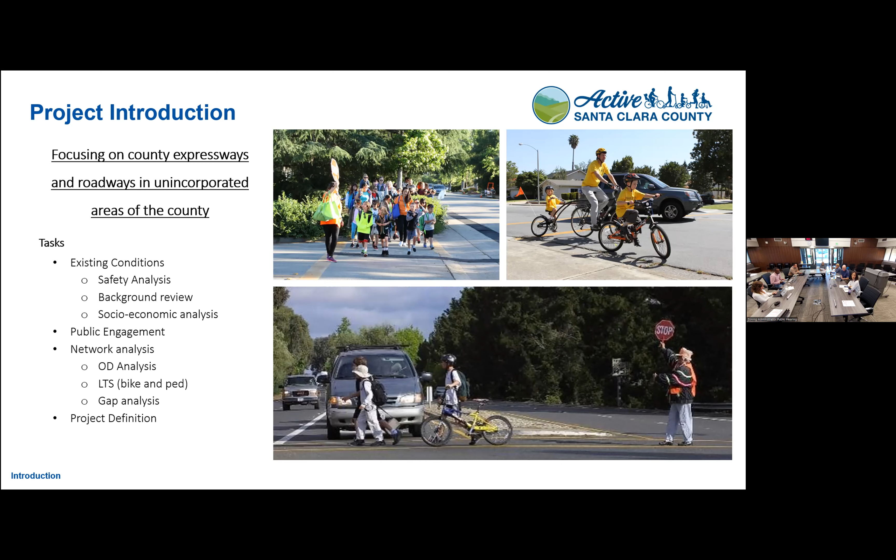In terms of the timeline, this is one of those COVID projects, so it's taking a little longer than usual. We started very much online, then went a little public, then back online. I'm just happy that I'm seeing happy faces over here for the recommendations—I'm assuming you guys are happy, right?

We are at the recommendations phase, so at this point we're requesting feedback from the community on the recommendations we're putting out. After that, we're going to take all of our recommendations and your recommendations, mesh them together, prioritize them, and then publish a draft plan so the community will also have input on that. Hopefully by the end of the year, winter of 2023-2024, we'll have a plan we can push forward for final approval.

Again, providing a quick summary of what we've been doing. These analyses, particularly the health and equity analyses, will help us really focus on how to prioritize, and where to prioritize, for all of these things.

We wanted to understand where the more disadvantaged folks live. This is not just Los Altos, not just the northern part—I am just presenting today the northern part of the county since we're talking about Los Altos—but we wanted to understand where the highest concentration of equity priority communities, as defined by the Metropolitan Transportation Commission, or MTC, are located. For the most part, many of those communities are in San Jose, in the core of San Jose, in the northern part, and also the southern part. There are pockets in Gilroy and in the southern parts of the county.

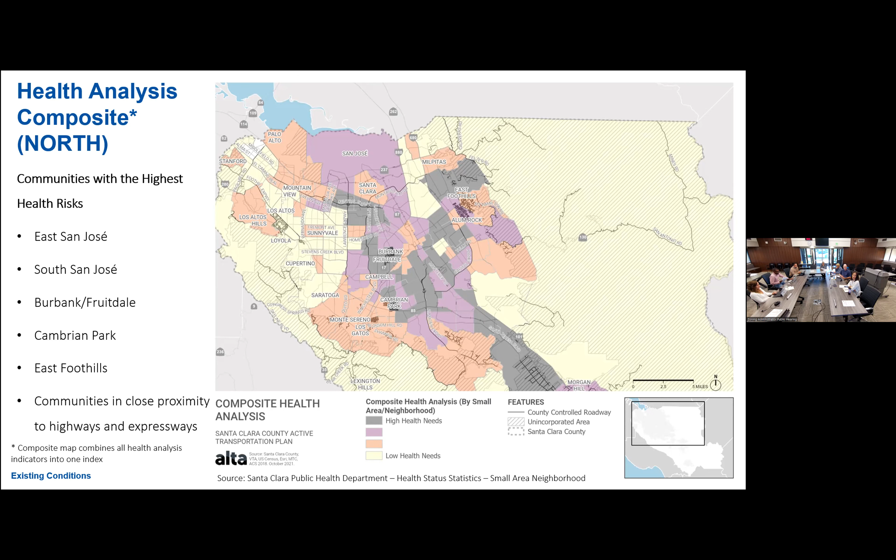Likewise, we did an analysis of health components. We looked at life expectancy, high blood pressure, heart disease, prevalence of cancer, and diabetes. Meshing them together, we understood that the highest prevalence of health inequities, again, are very much located in those areas I mentioned before, on East San Jose, some of the foothills, and some of the pockets in unincorporated areas.

As part of this existing conditions analysis, we also looked at what's going on the roadways in terms of collisions. Some folks call them collisions, some folks call them crashes—I'm going to refer to them as collisions.

We started very much in 2021, so we had data up until 2020. We used the latest 5-year data to understand where the highest incidence of collisions were and the types of collisions that were happening. We tried to identify those collision hotspots and where the biggest problems are throughout the county. We tried to look at it from the intersection perspective, but also at the corridor level, looking at the road in a complete way, as a complete street.

So we categorize those into intersection collisions - those that happen within 250 feet of each intersection on each leg - as well as the roadway corridors, which is basically just the longer side of streets.

The source of the data we use is Crossroads, which is pretty much up to the minute level. The county had lots of really good information and data on that. I am going to be presenting mostly aggregated data for the full county. I apologize, I don't have specific ones for Los Altos, but I'm sure folks know where many of them are located.

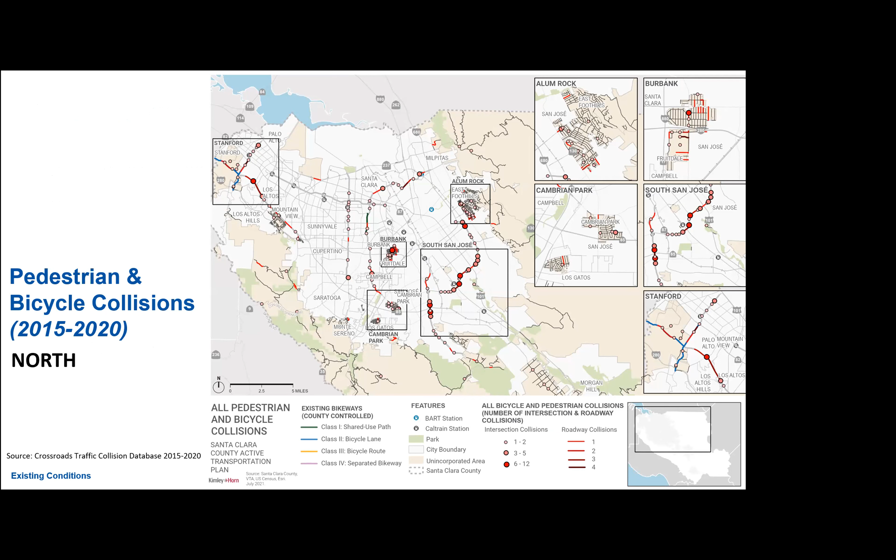This is how we mapped them - you'll see the number of collisions at intersections as well as roadway collisions. For this area in particular, not a big surprise to folks, Foothill really came up highlighted, with 6 to 12 at intersections and more than 4 in some places throughout the expressway. I want to highlight this is 2015 to 2020 data - we have not updated it since then. We've seen generally in the Bay Area that these trends have changed through COVID.

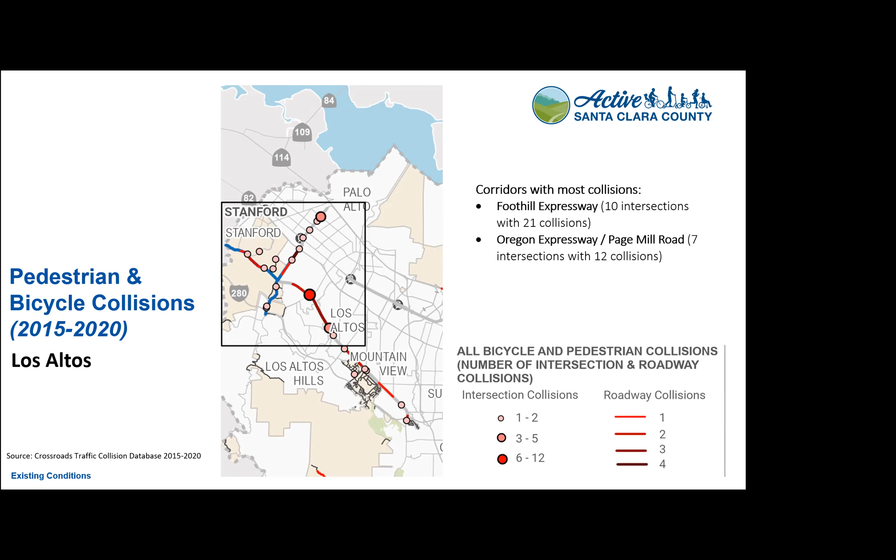Generally speaking, countywide, that's where most of our collisions happen - on expressways. There are a number of collisions on more localized streets in unincorporated areas, but the expressways do tend to experience most of the collisions.

On the community outreach side, this is going to be very high level. We really wanted to focus on going out to the community and being inventive, so we hosted a number of pop-up events as well as going to different places that were already there. In some of the photos you'll see some of the pop-up events we conducted. We also worked with a number of CBO organizations, community-based organizations.

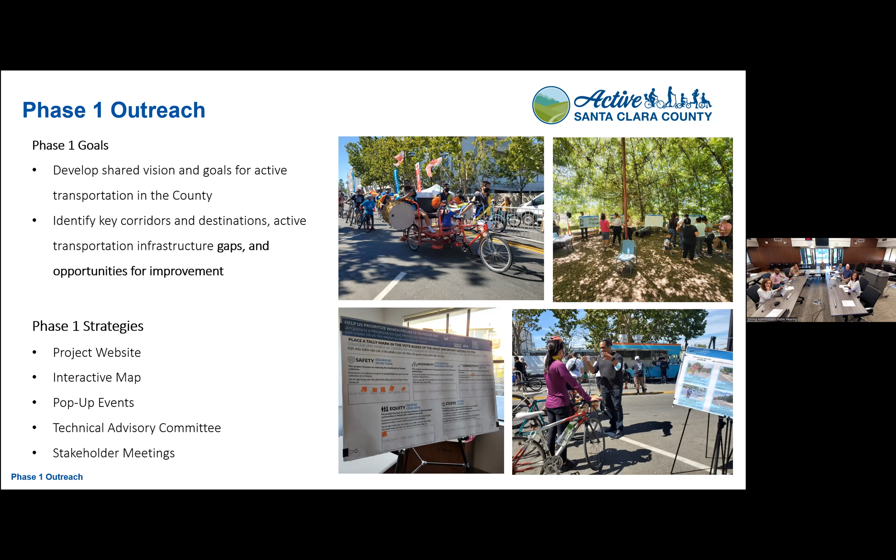And so you see some of the boards and some of the conversations that we had. We also talked to a number of technical advisory committee, or the TAC, as well as stakeholder meetings. We held some of those.

That said, many of the comments we received in phase 1 did come from the northern parts of the county, which is what we expected. So we wanted to go out there to different communities too.

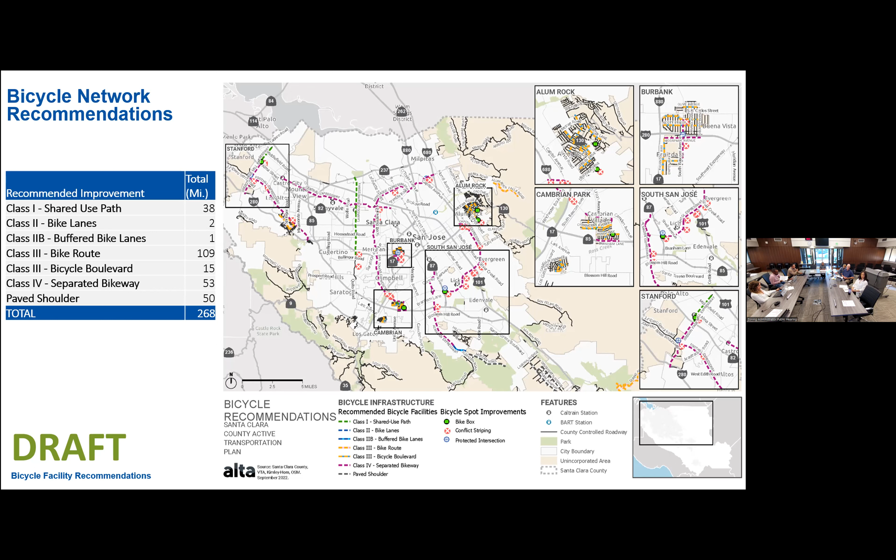This one will be biking. You'll see here in the southern part of the county, it changes a little bit more. We see a lot more people biking recreationally.

So the yellow lines that you see here, the yellow dotted lines, we have them as bike routes, signed bike routes. So that the more Lycra folks like myself, the folks that feel comfortable biking anywhere and everywhere, they can actually do that. At the same time, for those folks that are the mom and pop that need a little bit more help, we did create a bit of a network through trails.

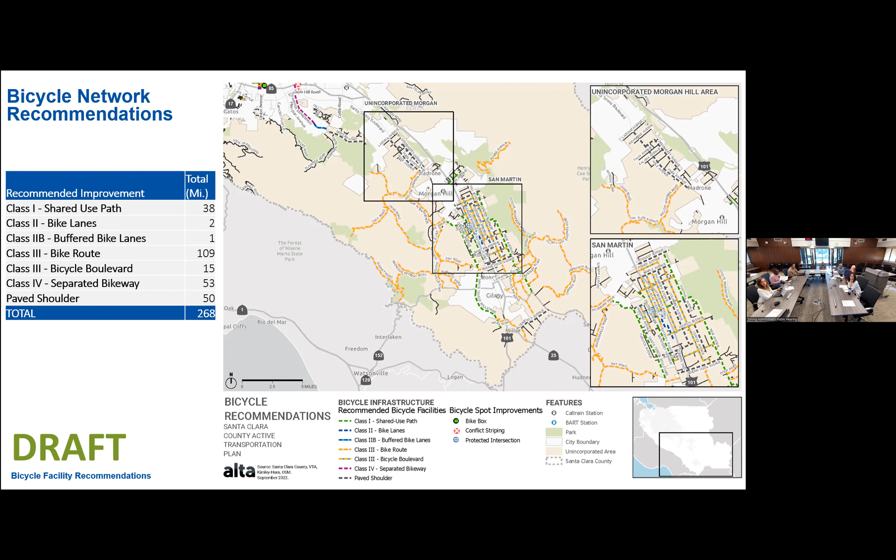And again, this is being coordinated with the trails, with the Parks and Rec Department. So their recommendations are very much linked to our recommendations. Our recommendations are linked to theirs. So there was a cross-pollination and cross-reading.

For Los Altos or close to Los Altos, we're recommending class 3s or bike routes, signed bike routes, and kind of the more neighborhoody streets. But I think the important part to highlight is the Oregon Expressway and of course Foothill Expressway.

We do see the potential to having implementing a class 4 separated bikeway. That is about 10.2 miles from 280 all the way to Oregon Expressway, and Oregon Expressway from Foothill to, what is it, 101, I believe.

Again, these are very draft. We have more details online. You can actually link on each one of these lines and markers and really look into the spot improvements that we're calling for. I'll be talking about the spot improvements on the ped side of things, and I'll be highlighting what we're thinking of those.

Shifting over to peds, they're a little bit of a slower user, so we have to consider those things on how much time it takes to cross, how much time it takes to go along.

So you'll see that very many of these recommendations are along the expressways, either slip lane reconfigurations or improving curb ramps. And I'll talk a little bit about the reconfigurations and what we're talking about.

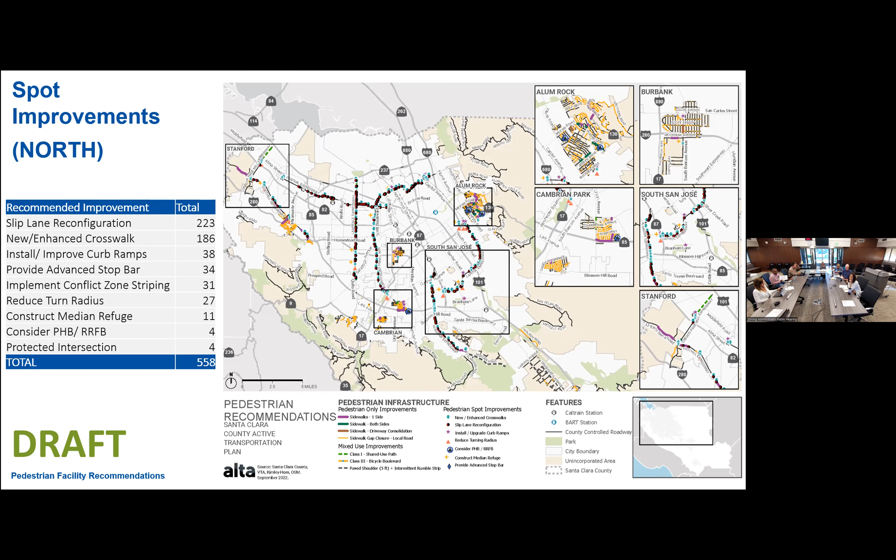Want to highlight a few slip lane reconfigurations. It's mostly focused on Foothill, El Monte, Magdalena, Arboretum, and Vineyard, as well as some sidewalk implementations in some places. You can tell us if we're correct, or if not, we're game as well. We're really focusing on making it easy for people to walk from one place to another and making it harder for cars to go really fast through intersections.

So what do we mean by slip lane elimination? These are some examples that have already been implemented. At the top, this is from a few years ago at Plumeria and Montague, where they had slip lanes. One configuration was closing it and tightening it up, so people driving southbound on Plumeria couldn't just go through the intersection fast, but actually had to slow down and check for pedestrians.

This is an improvement we're calling for, where we see a lot more potential for people walking and biking. This is also called slip lane removal. There are some configurations that will need to be made at that localized level, so again, these are very high level recommendations.

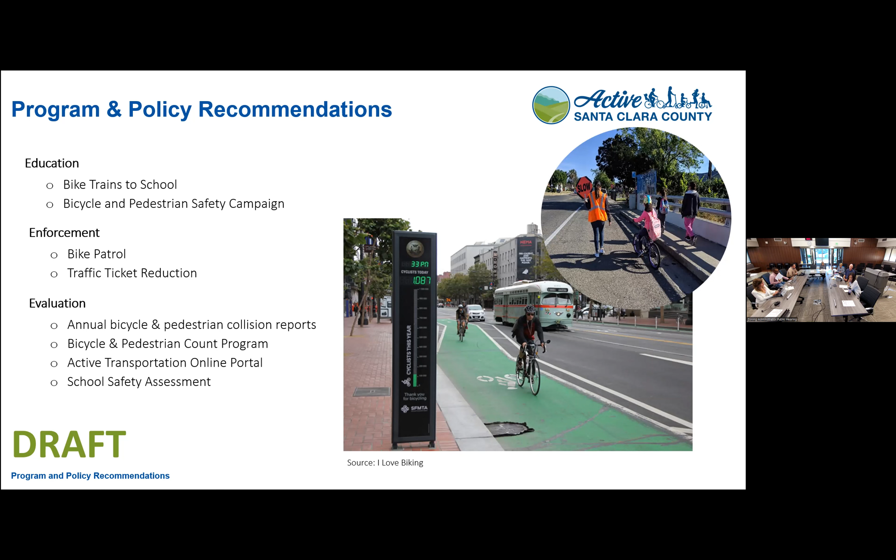Also evaluation - we really do want to know where people bike and or walk. So really having annual counts and collision reports, as well as providing information about what's going on in the county, being very transparent about what's being built. The county's already doing some of these things, but really putting information out for the community to learn what's going on.

And, oh my God, next steps. Again, one thing you'll remember today is the website, right? ActiveSantaClaraCounty.org. We are opening the portal until June 16th, so that's two weeks from Friday.

That was to accommodate a couple more big events, including Viva Calle, as well as a few different jurisdictions that requested this. So that will be the last time residents will be able to provide information or input on the recommendations. After we're done with this recommendation period, we'll move into development of the plan, and you all will be able to opine on the actual plan.

So the document will be posted online. You'll be able to mark it up, tell us if we missed a period or a comma, or if my Spanglish comes out in my English - I do apologize for that. You can tell me that on it.

Again, ActiveSantaClaraCounty.org, that is the website. You can check the recommendations. I see some of you already digging into that, so it's very encouraging. And with that, I will be opening it for questions.

One more thing I wanted to add was the next steps after this master planning level study. The next step will be a corridor level analysis that we're going to do on the expressway. We were able to secure a grant from Measure B, and the expressway got awarded I think $450,000 of money from the Measure B bike/ped program to study this corridor.

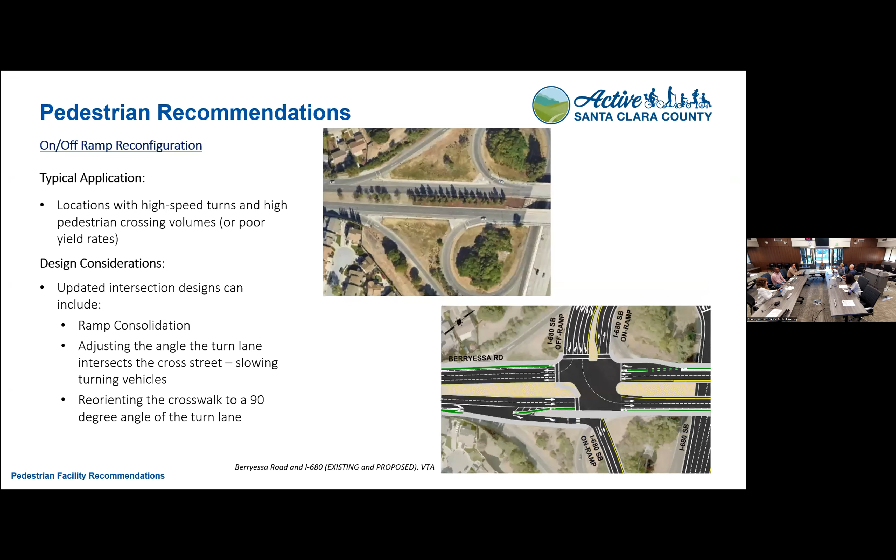The other question I had was, in your data, it's 2015 to 2020. We all know things happened in 2020. Shutdown started around March. How much of 2020 is included in your data? Is that step down of incidents a false indicator of a drop? Because if it includes all of 2020, we stopped driving about March 12th and didn't go back until about March 2022. It's been a minute, crazy, since I looked at the data, so let me actually point you to that, just trying to understand how much of an impact that is on your data.

So if you keep going, this is that bar chart, January 2015 to December 2020, so you're capturing nine months of no driving in there. Less driving, well, only essential driving, only essential driving to the grocery store. So it just helps me understand, because a lot of those corridors are commute corridors, not going to the shopping, grocery store corridor. Okay, if that, that answers my question.

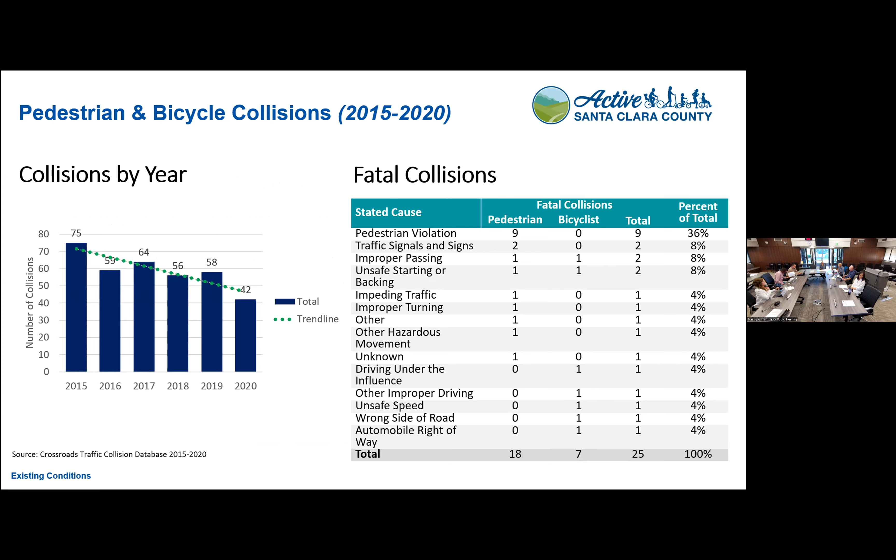I had a question on the Loyola Summerhill Loop, the bike route there. Is that a recommendation coming from the county because that's unincorporated? Correct, so that part around is unincorporated, so yes. If it's incorporated, it's under the jurisdiction of the city, it's not, so it's unincorporated, and that's why. Okay, just clarifying for myself and folks listening.

And then, two more questions. Who pays for these improvements if they're approved? Is that the county budget or is it a cost sharing? So basically, what the plan is, the county roads and airports department gets its funding from tax, gas tax, so we employ the money on road improvements. But the bike path related projects, depending on funding that we can allocate to the bike path, we also are looking into grant applications to get money from the state and the federal government to enhance our budget or to help do these projects.

So will there be any expectation of Los Altos to fund any portion of the design or implementation? That can be discussed with the city if the city has available funding that they can contribute towards an improvement, but as of right now there's no expectation of the city. All right, thank you, those are all my questions for right now. Thank you. Anybody else? Tom?

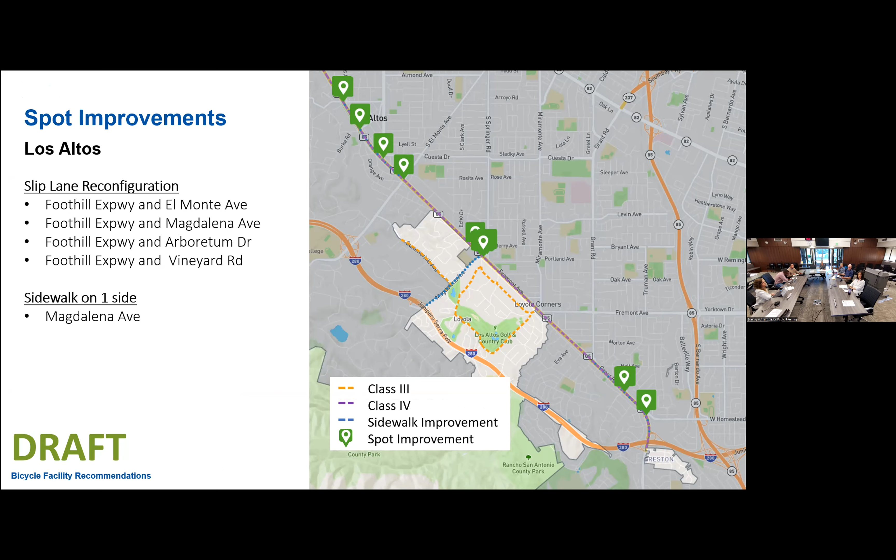Yeah, on these slip lanes or elimination, are you always gonna incorporate right turn only that's shared with cars and bicycles? Your pictures here show that's what you're doing on page 38. So I thought that was a good idea, because what I've seen when they do eliminate that is if you get a bicycle and a car in the same shared lane, one can't pass the other, and I've seen them get frustrated either way, whoever's in first. What's nice in the slip lane is that you can actually take a right turn on red, and I think it alleviates wasted gas, but I understand the idea.

Right, so I like where you've done that, reducing the angle, but also where you have in that picture a shared right lane, and then if a bicycle wants to go straight, you have the green lane. I think that's a really good situation, but I don't know if that's gonna be in all cases. Yeah, I mean, again, these are just examples. This is not a cookie cutter approach. We can't just implement this same facility based on right of way availability, traffic counts, and how much real estate you have.

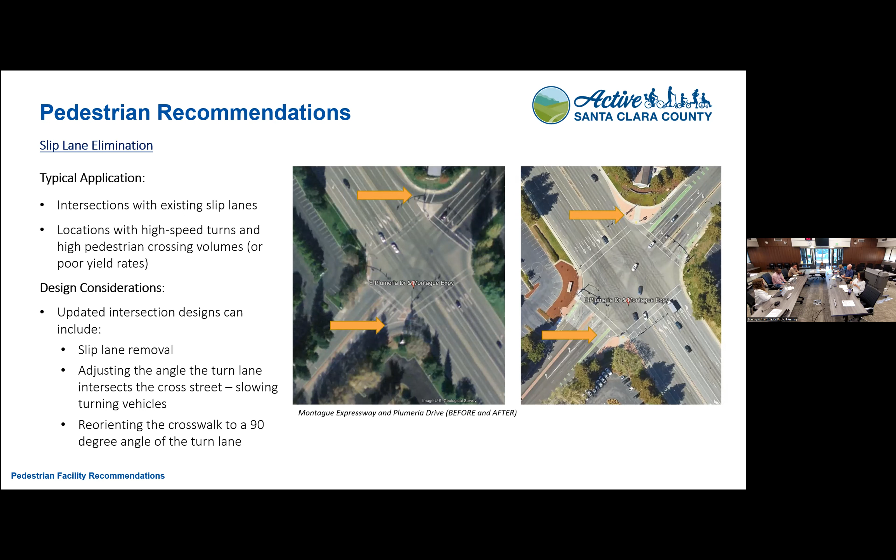Fair enough, but I do appreciate the comment, because I also really love going on the green lane and really appreciate having space for myself rather than competing with other cars or other people. So yeah, I think the point's well taken, and some improvements may not happen because of the number of people driving, the traffic counts I should say. We may not implement specific improvements at specific places. We'll just have to continue to study them a little bit more.

Again, this is a very master planning effort, so I can't just say, hey, let's implement this right here. I'm just telling you what we can see, in professional opinion, with the right of way we're using and the amount of traffic we're more or less seeing, we think it's possible. Also, this is done by the planning department, which is a policy level, plan level study. The traffic department, which oversees the operational aspect of the expressways and the rural roads, will be having a strong opinion on implementing this improvement. So it's on a case by case basis and location dependent. That's good, comfortable. Okay, thank you.

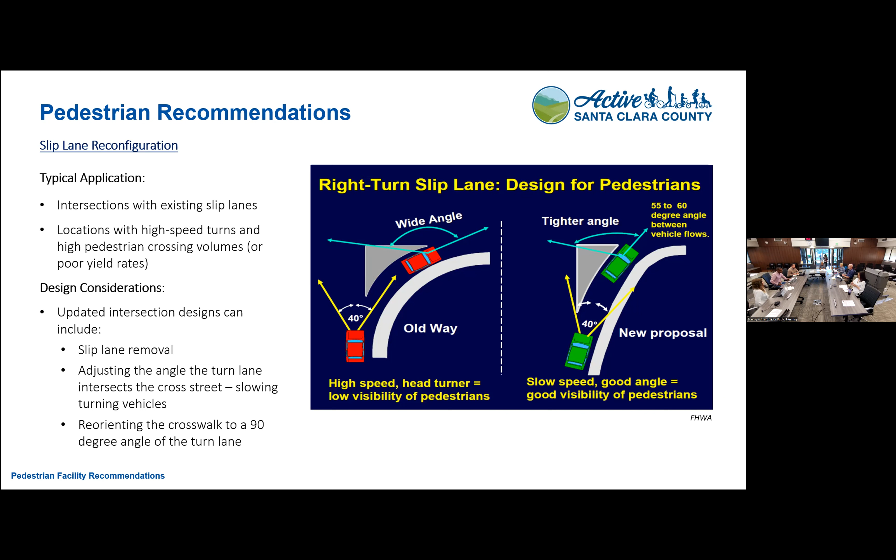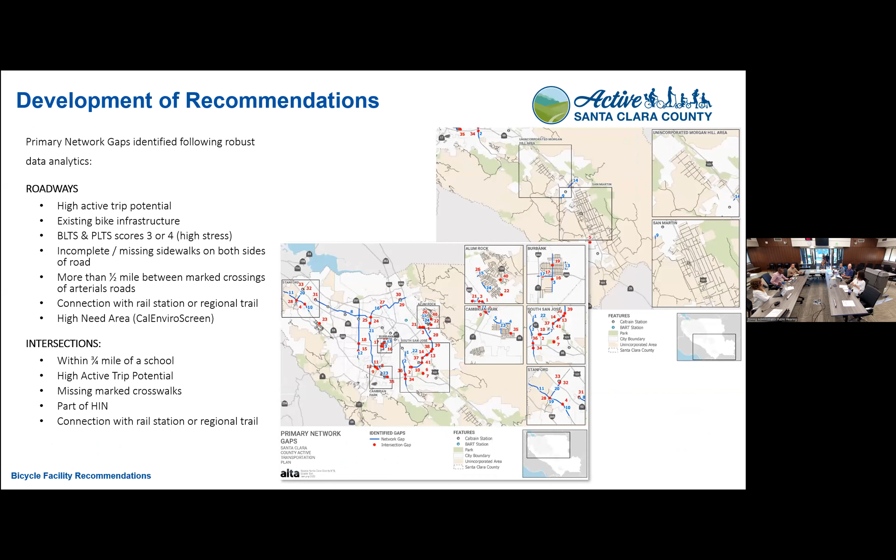Yeah, a question on the primary network gap slide. I think you're showing one gap, is that right? Yeah, that's it. In this one, but try to blow it up.

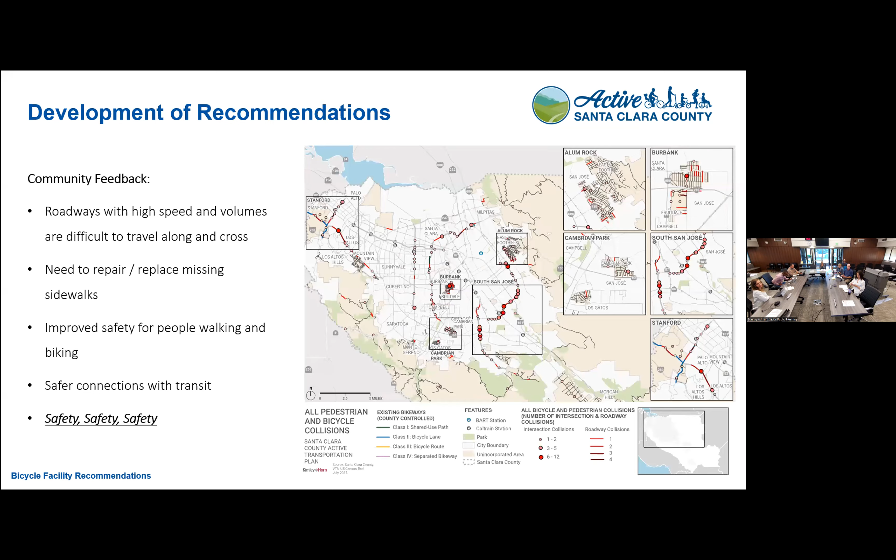It's going, sorry, it leads to the 237... 34 there, slide 34. Sorry, I don't have my slide. What's the name of the slide?

Bicycle network. This is the primary network gaps after needs analysis findings. Most of this one, yeah.

There's that blue network gap line running leading to 237. Is that Grant Avenue, or is that in Los Altos? I wanted to see where number 12 is on the blue. Oh yeah, that's right here. It's the Cupertino 85, isn't it? That is Cupertino. Oh sorry, yeah, that was Los Altos, 85, yeah.

So basically Los Altos is this portion. Sorry, that's as much as I could do. No, I totally misread the 237 marker over there.

I do want to highlight that the numbers in these maps are very much tied to the number of intersections and number of segments, not actually highlighting the actual roadway. So the reds and blues are segments and intersections that were highlighted in the primary network gaps. Does that make sense? Okay, got it.

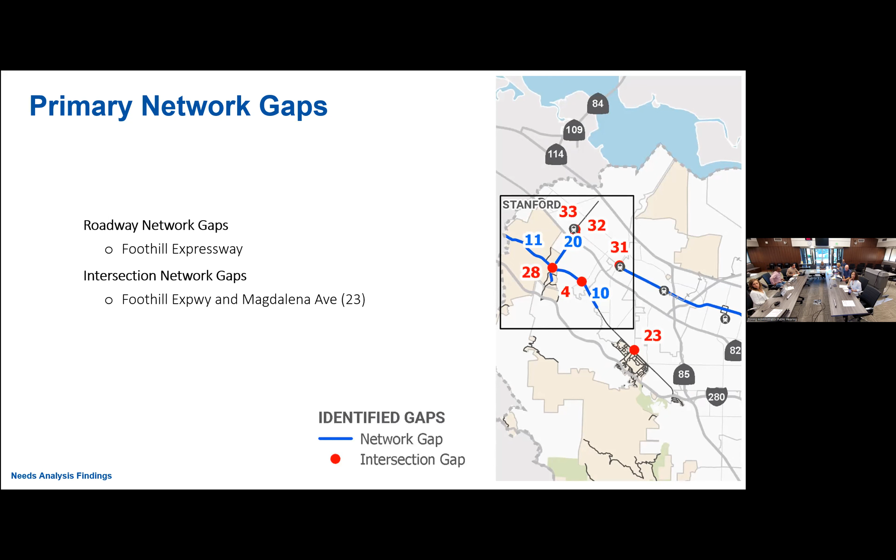I just have a couple of quick questions. Can you go back to your timeline on the entire project? So yeah, can you go back to the project from... I'm looking at you while I do it. Sorry, okay, that's fine, it's gonna take a while.

So you're closing public comments on the online maps on the 15th, on the 16th, June 16th. But I'm seeing that you have the recommendation public input map all through summer. Is this just a plan to close it early, or?

Yeah, so we started recommendations about a month and a half ago. It's us developing the recommendations and putting it all together, because after we close the public inputs, we still have to go back and discuss it with the county and say, hey, these recommendations we're including or taking out, and this is how we're going to prioritize. So as part of that recommendations portion of the plan, we still have to go through a level of analysis that tells us, all right, these are all the projects, where should they land in terms of implementation? Are they priority projects we can implement right now? Are there priority projects that are going to cost a ton of money? So where can we get them in terms of implementation? Basically we'll be done with all of the analysis by the end of summer, whereas we hope to have a full draft document that you can see.

Can you give a general idea of what the response from the Los Altos segment was so far on the maps? Do you have an idea?

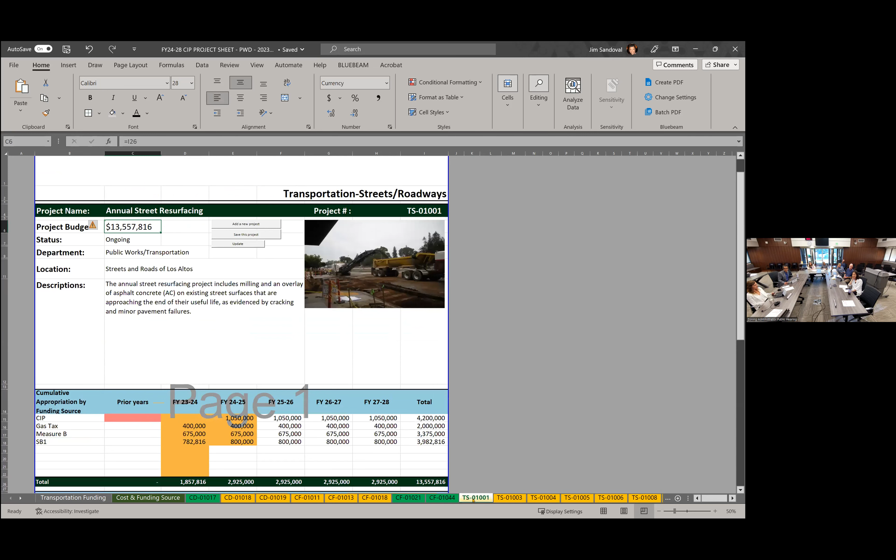The next project is street resurfacing. This is a multi-pronged CIP because we have one budget for overlay work, resurfacing with asphalt, another one for slurry sealing, and we actually do micro surfacing, which has a little more aggregate in it.

And then council committed to 3.5 million per year to get to our PCI of 75 by year 26. And so we're actually doing super well at that.

Did Nafis already present that? Okay, I don't want to steal her thunder, but we're ahead of schedule. So we're doing extremely well. We just got the study.

So for the resurfacing portion, each one of these cut sheets shows the 5-year CIP. And as you can see for asphalt overlays, this upcoming year, we're not putting any CIP money towards that.

We're committed to a maintenance of effort. So with these Measure B and SB1 funds, we have to match a certain amount. I think it's 1.9 million a year, don't quote me on that, but it's right around there.

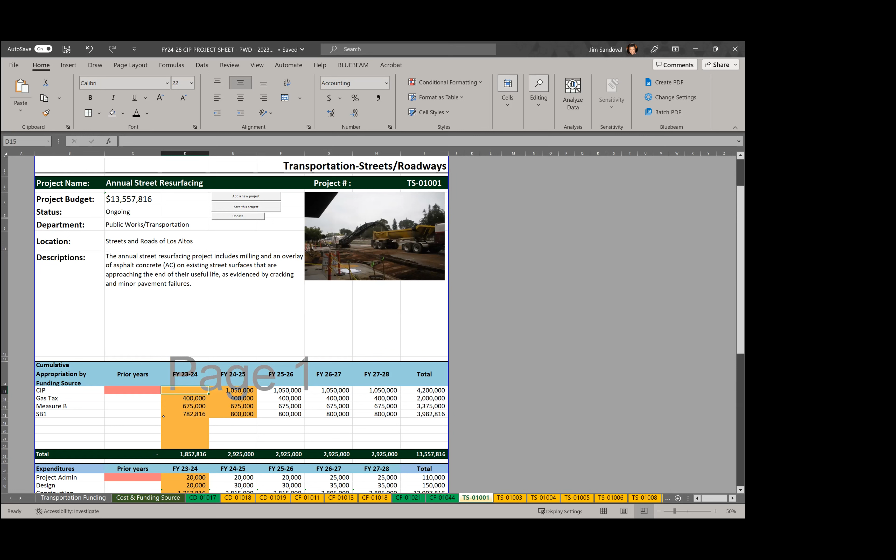And I feel a little more comfortable with that this year just because of how good we're doing with the PCI. And then, yeah, we got gas tax, Measure B, SB1 that all plays into this.

The next project is the annual street striping. So this is kind of a two-pronged project where, when we resurface a road, we've got to grind off all the existing striping and then replace it. And then it is also used for adding complete street elements, bike lanes, and so forth.

So this year we're at 250 for that budget. VRF funds and gas tax.

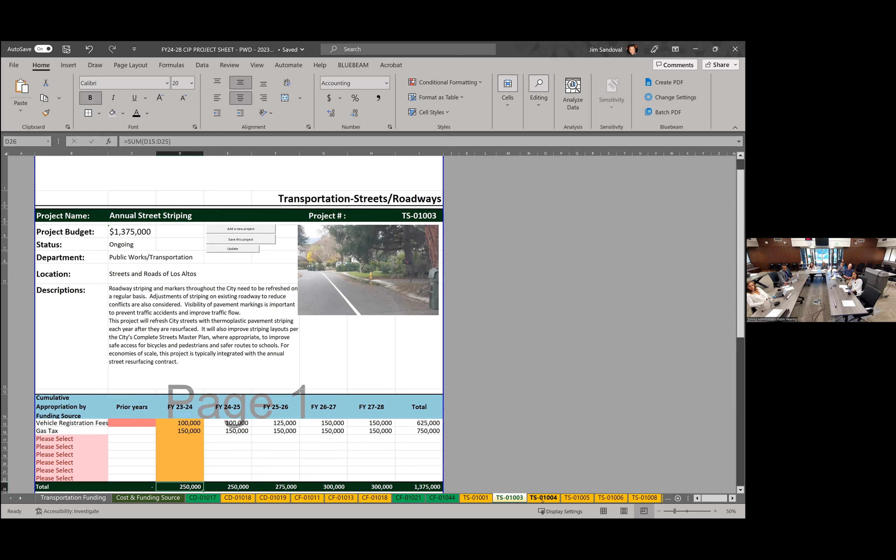The other big element, as I mentioned, is slurry seal, in our case, micro sealing. We're usually more like this 24-25 budget of 1.15 million. Again, this year we...

We kept the gas tax the same. We only had so many VRF funds to go around and we reduced our general fund amount. So this year we reduced it to 750. Overall, that all resurfacing work sums up to about 2.6 million instead of the 3.5.

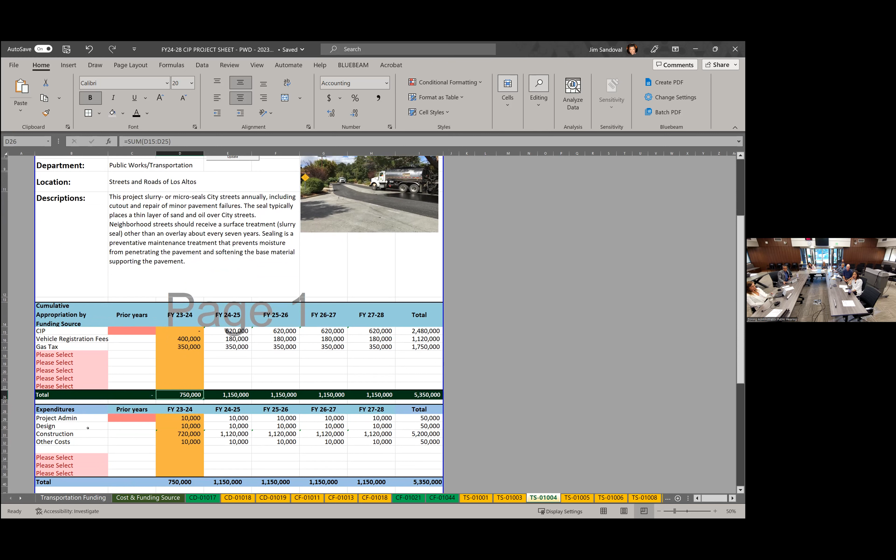And if I didn't explain this, each of these cut sheets covers different portions of the project: project admin, design, construction, and then other costs such as inspection and testing.

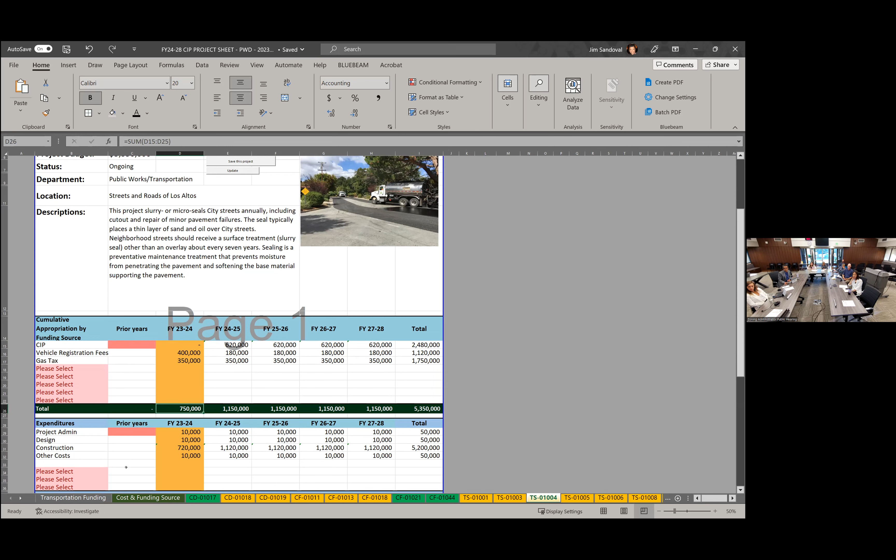Why is there such a drop off on the vehicle registration fees from this year to the next fiscal year? We had some banked VRF funds this year that we haven't used yet, so this was a good place to plug that in. But our normal allocation is about...

Annual concrete repair, reduced this one slightly this year. This is from traffic impact fee. I thought I had $1 million, but I was just told it's $950,000 of estimated transportation impact fees. So that's what we're using for this. Typically this concrete portion is for projects like the St. Joseph Sidewalk Gap project, which we combined with the resurfacing project for economies of scale. It would be for projects where we might have sidewalk needs in the midst of our resurfacing job, or for any kind of ADA ramps that are needed. We have an ADA budget, but it's a little slimmer this year, so we kind of mix and match those two budgets.

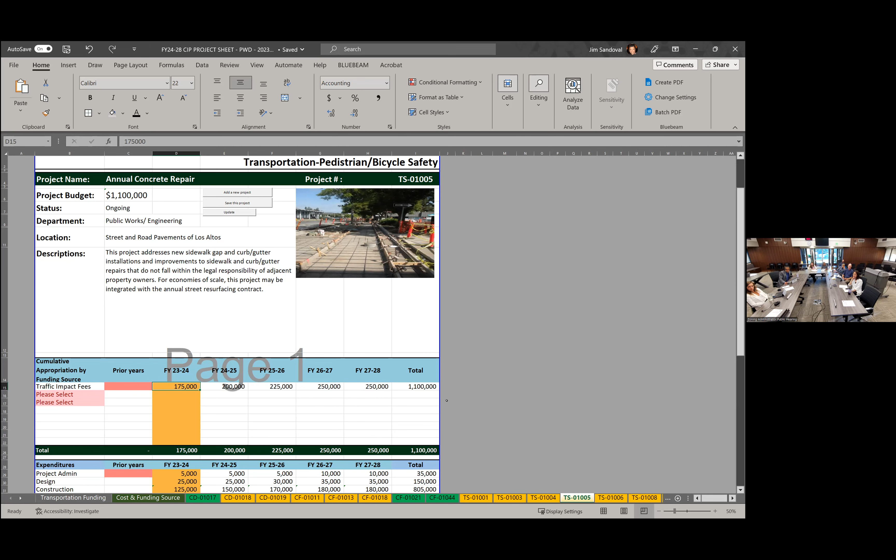Annual traffic sign replacement — this is something we've needed and we're trying to get caught up on. This year I got capacity for about 100 grand. This is to replace signs that have weathered and worn out, and also for adding new signage if Maurice is adding bike lanes or complete streets improvements on roads where we're resurfacing, since those sometimes require supporting signage. We also need to do an inventory and condition assessment of our street signage around town, similar to a PCI, so we can get up to speed on a sign replacement program over time.

This is the annual ADA budget. This year, since I'm trying to spread the money around, I've got 30,000 allocated, growing a little bit over the next couple of years. Again, if there's a greater need than 30 grand, we've got that concrete budget to help with that.

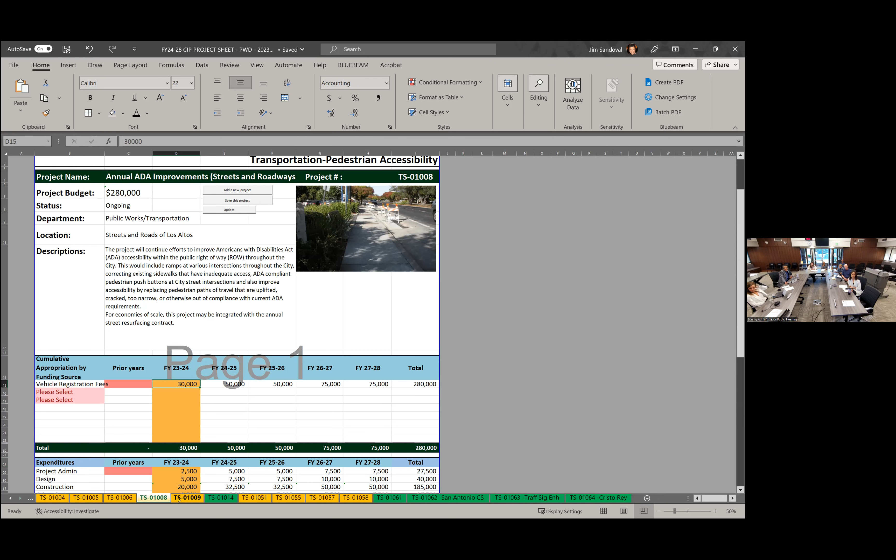Alley resurfacing — we've traditionally funded about 50 grand a year for that, but can't buy much for 50, so we tend to do it every 2 years, at least having 100, so maybe we can do 1 or 2 alleys per year. It's something that needs to happen, not a priority unless it's a super dangerous situation, but compared to all the road work it's not a priority — well, it is a priority because it's in our budget, but it's something we chip away at. This upcoming year is one of the off years, and then the following year's resurfacing budget should add 100,000 to it.

As it turns out, this past year the alleys we selected came in a little higher in bids than 100,000, so we had to kind of rob Peter to pay Paul from some of the other resurfacing funds, but it all worked out in the end. Good choice of words there, DK.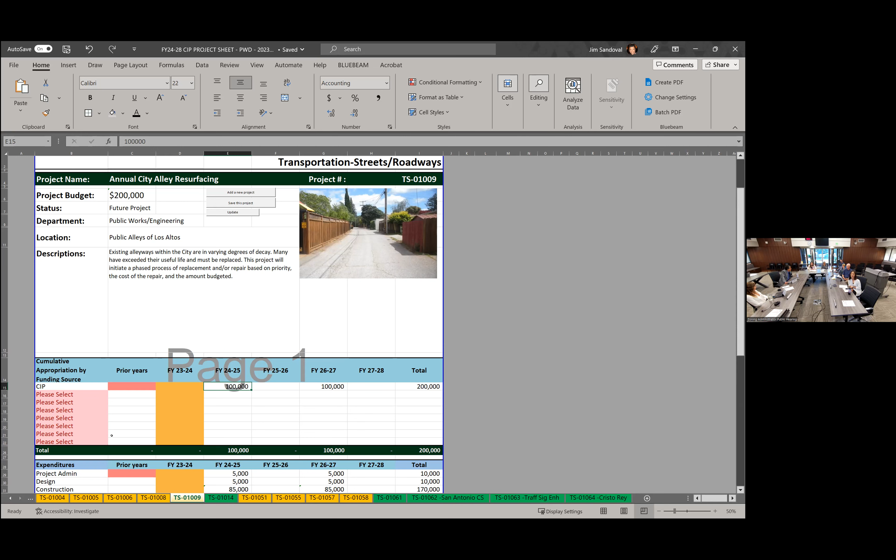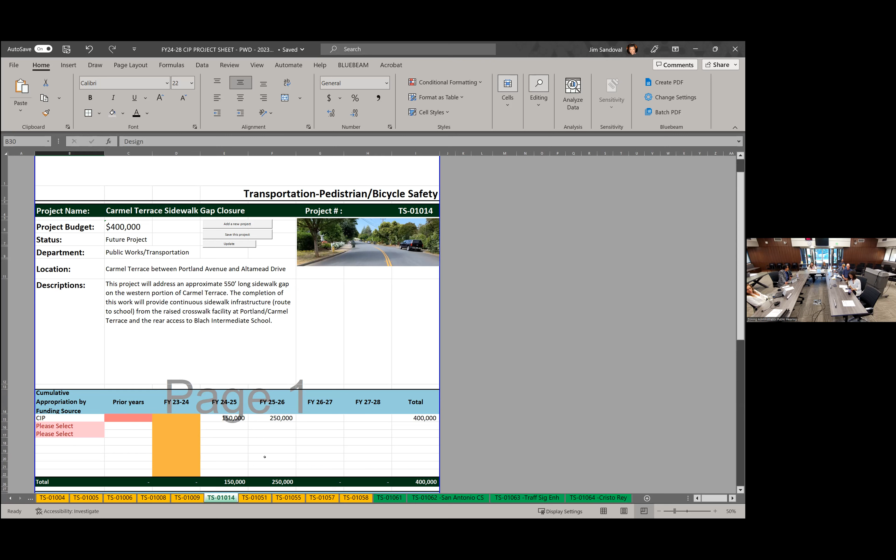Carmel Terrace sidewalk gap closure — we pushed off design to 24-25. I know this has been in our CIP for quite some time, but it didn't rank very high in the CSMP, so it's still on our radar. Staff and council committed to this several years ago, so we'll see what council feels about putting it off another year. We're estimating 150 for design and 250 the following year for construction — that may not be enough, but that's where it's at in the CIP right now.

Ditto for University Avenue and Milverton sidewalk gap — this has also been on our list for a number of years. It's not a safe route to school, and since the CSMP we know there have been other priorities identified for safe routes to school, so again proposing to push this out a little bit.

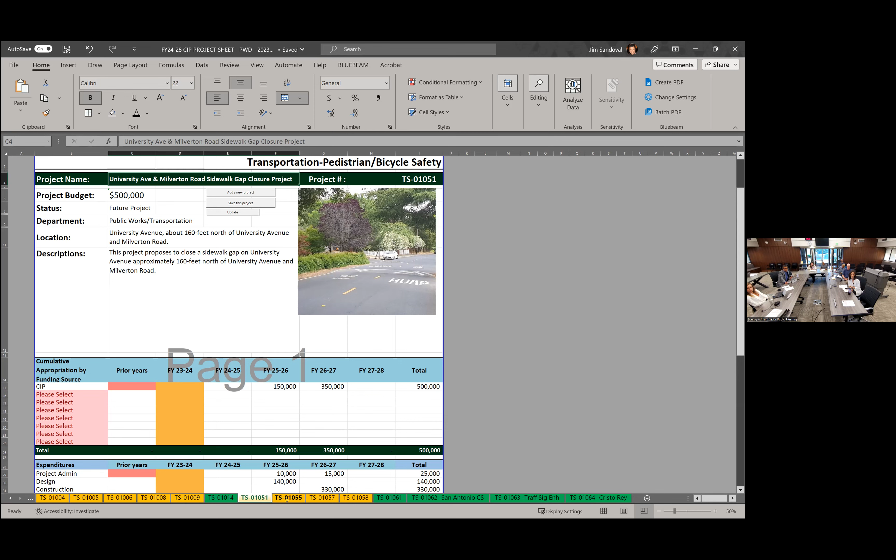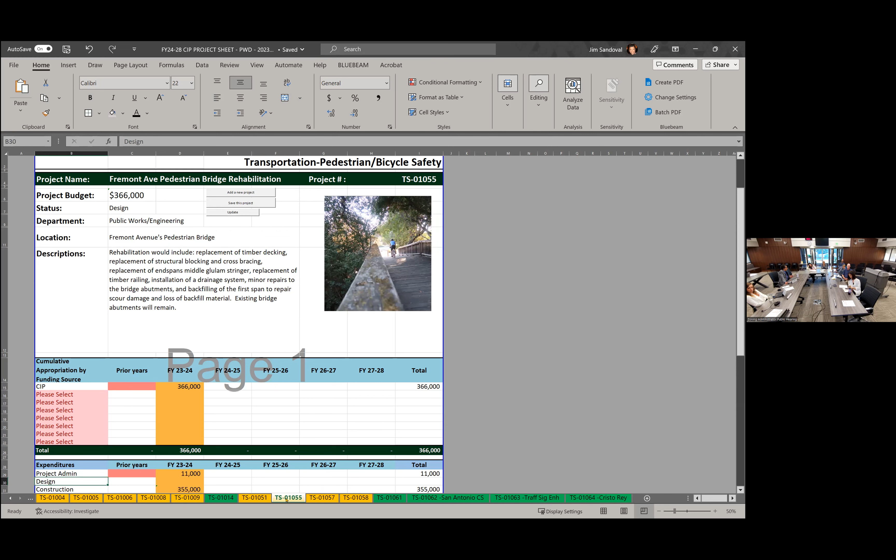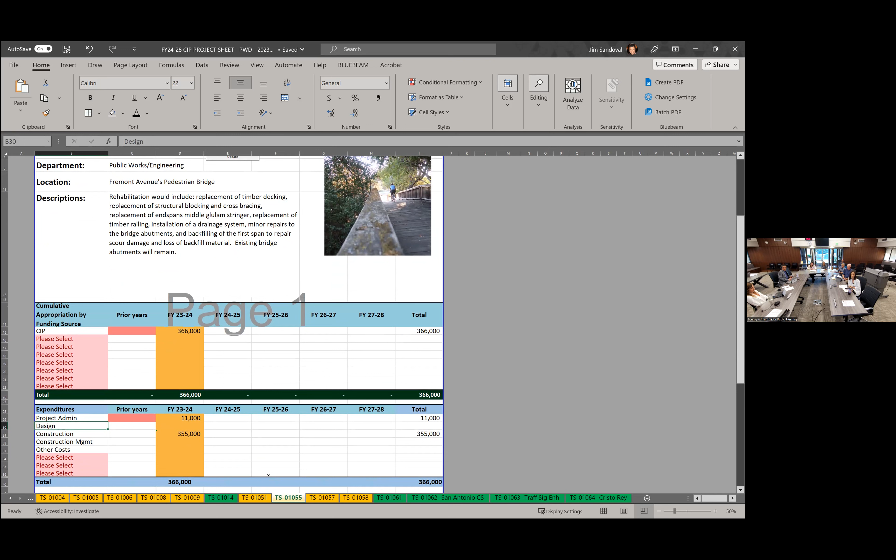Fremont Avenue Ped Bridge rehab — Nafisa is almost ready to put this out to bid. You may recall the Ped Bridge is old and weathered, and we've had some areas in the wood structure that have rotted, so it has a temporary fix right now but needs a permanent fix. As our structural engineer reviewed the site, we also found some issues with one of the concrete footings — not a huge structural issue, more concrete falling off the footing that needs to be fixed to address any potential corrosion. So we're wrapping up that design this year, and then we'll put it out to bid in this upcoming fiscal year.

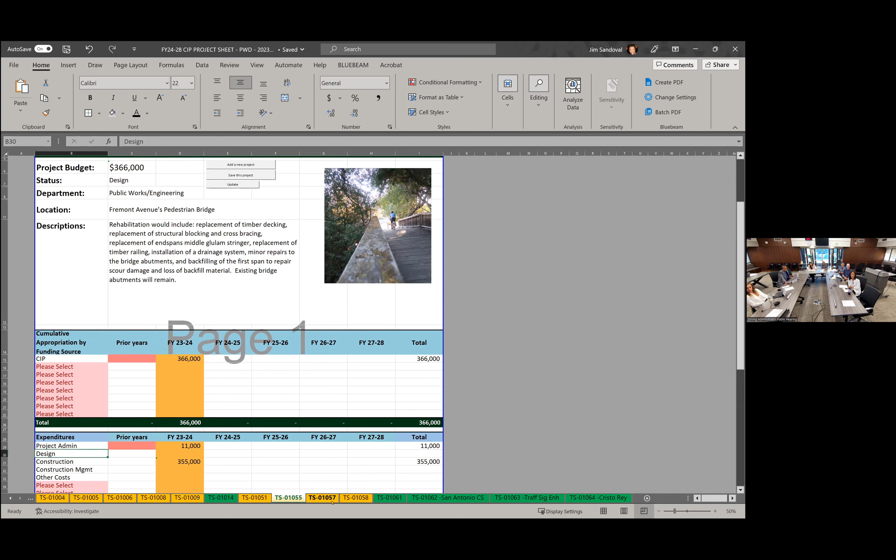The in-road light system maintenance, Maurice's team has that ready to bid, looking at about 445,000 of traffic impact fees, and the rest would be CIP, about a $600,000 budget overall, but for construction about 570,000. I don't know if this has been presented to y'all yet, but the design plan is to use rectangular rapid flashing beacons, which is kind of the latest and greatest technology for in-pavement lighting. They've been discontinued in 3 cities because they stopped working, and the maintenance is really challenging - parts are expensive because you've got to pull them out of the pavement, fix the pavement, and it takes time.

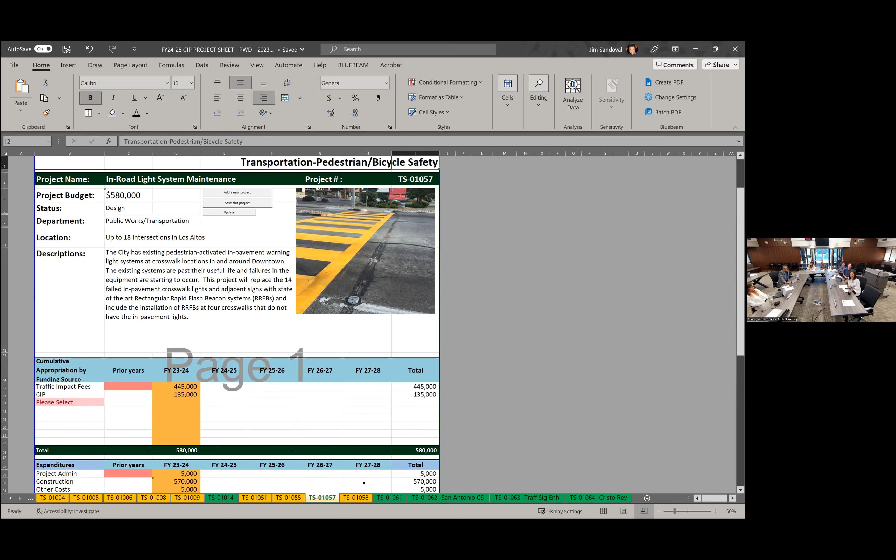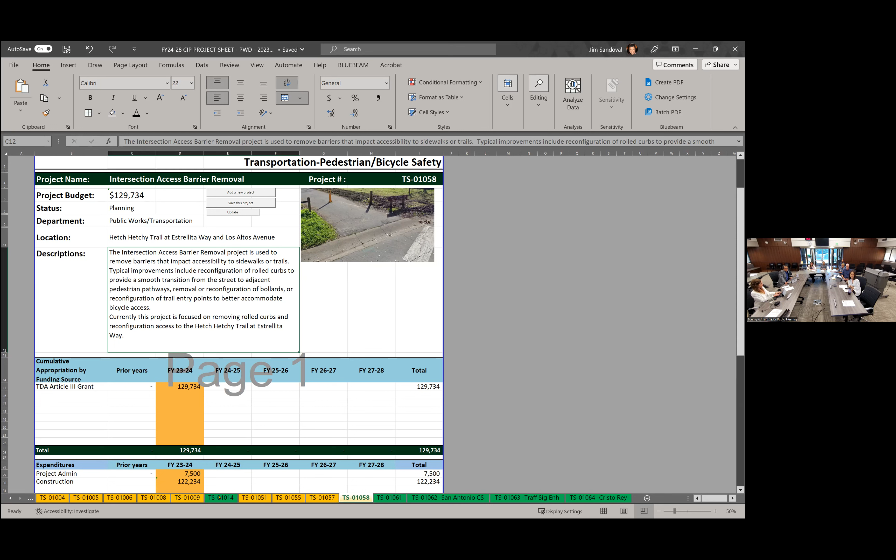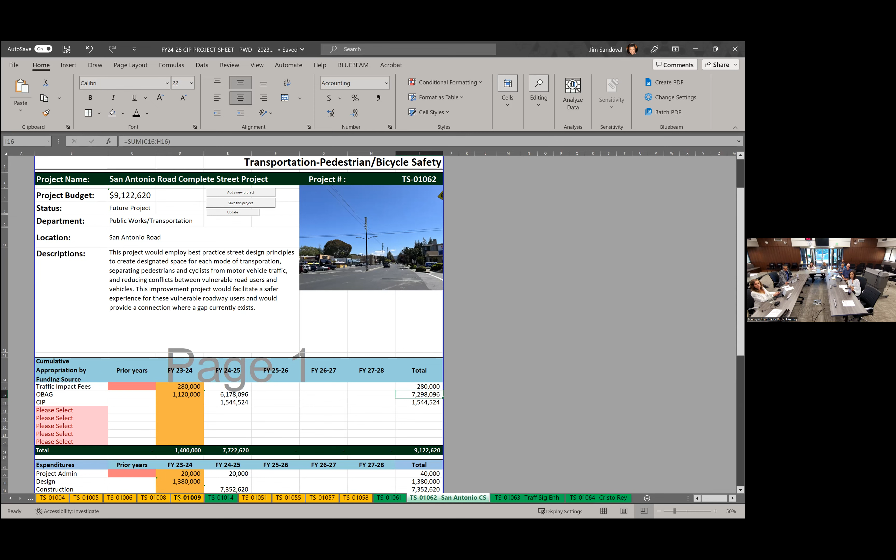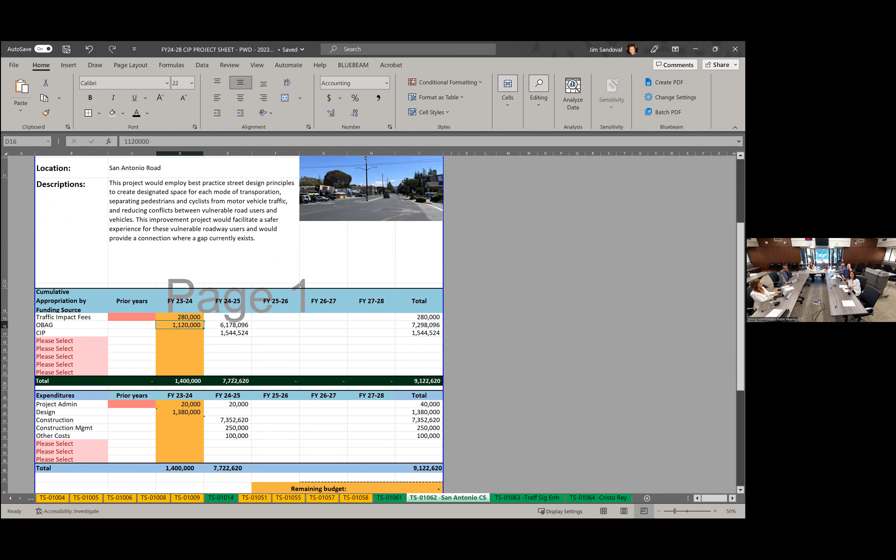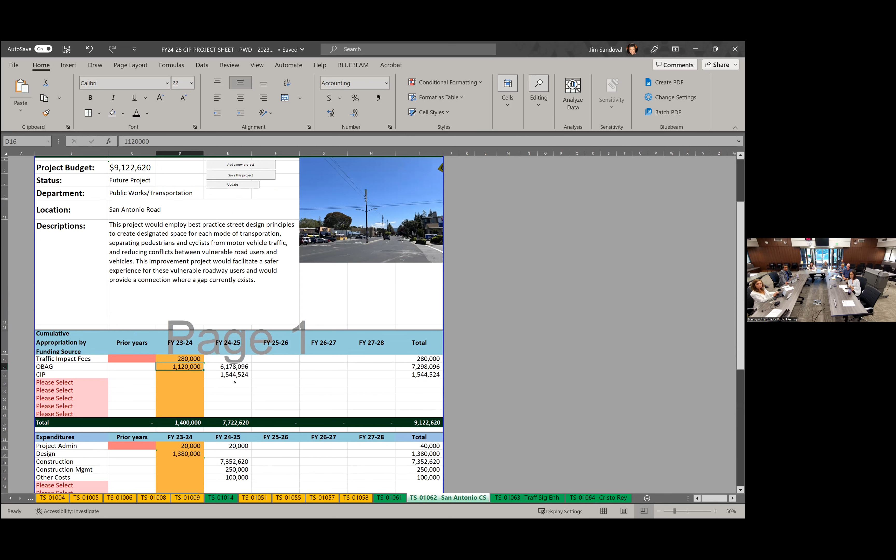Then we've got the San Antonio Road Complete Streets project - this is that wonderful grant we got from the MTC, a $7.3 million grant, and we're committed to matching a certain amount, which is 1.8 million overall adding up several little areas. For this upcoming year, the design year, our match is 280 for design, and we're expecting about 1.1 from them for design, then the following year is when we'll do construction. So we have a great budget for this project - should be pretty exciting to see what we get. That was the #1 recommendation, the #1 bicycle recommendation, in the CSMP.

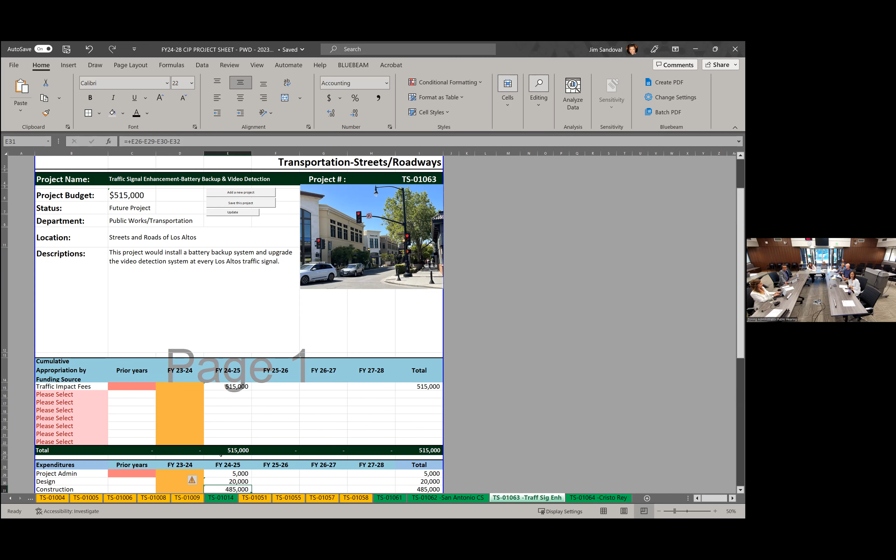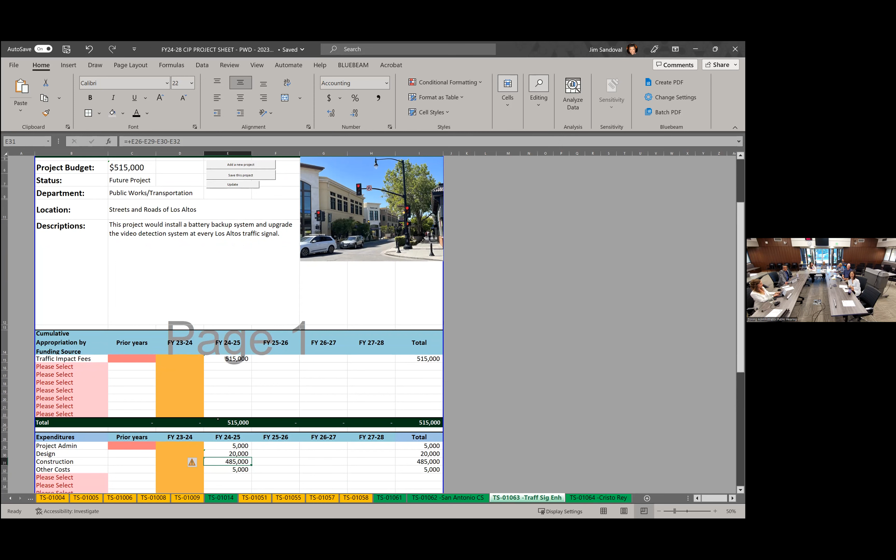From these storms, we discovered that some of these outages can be longer than anybody ever thought. So everyone was like, 'do we have batteries on our traffic signals?' And no, we don't - I think the one we do lasts a couple hours - so we're programming a project to do this. Unfortunately we couldn't make it work this year, so it's recommended for next year. Council might have a different take on it because one of those outages was during their council meeting - that was interesting. But I think there is a priority for this. It's not practical to install a battery system that'll last 3 or 4 days, but it'll at least make it safe for several hours, to the point where if it's a long outage, we have time to get stop signs out on A-frames like we did this year. This also includes upgrading the video detection at every traffic signal, which we need to - it's time.

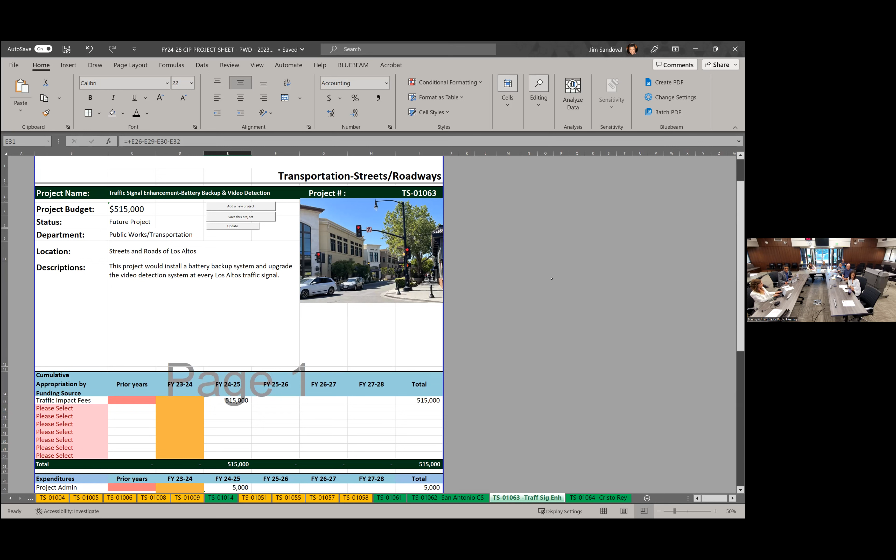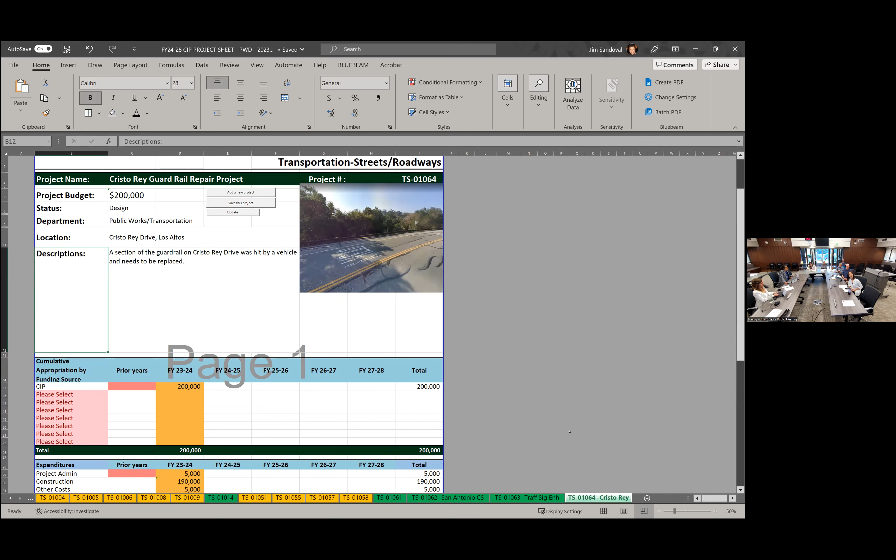Cristo Rey - so sometime during COVID, a car hit the guardrail going from Rancho San Antonio to Foothill, and it needs to be repaired. We have somebody designing it now, I think it's almost ready to go out to bid, and we've got 200, coming out of the general fund. Hopefully we can do it with that money, because it happens to be right at the edge of a steep slope, so it's going to have some deeper foundations.

And I think that's it. Happy to answer questions.

Yeah, that's great. Let's start with questions and then - actually, since this is an information item, let's start with public comments, then we'll come back for our questions and discussion. Does any member of the public present in this room like to speak, or anyone online like to speak? You may raise your hand if you're in the Zoom app.

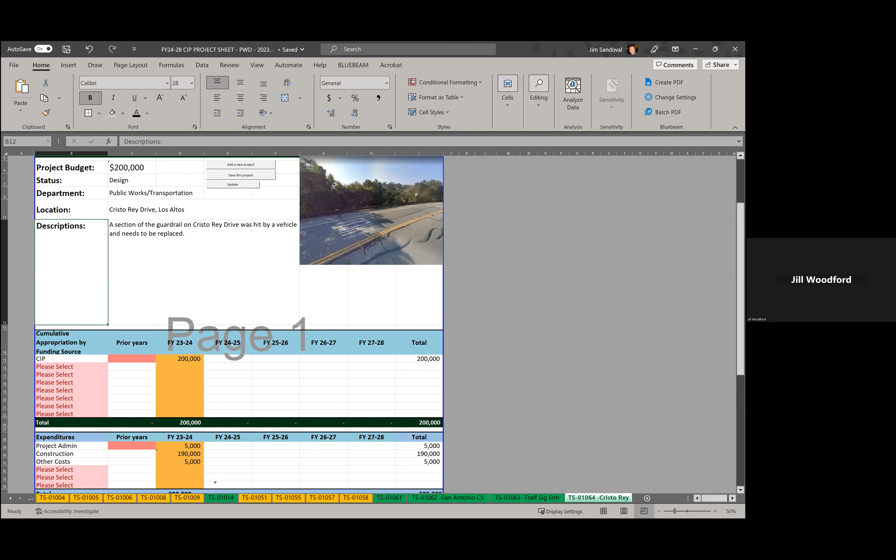This is a good opportunity to ask Director Sandoval your questions, and also we'll have a discussion too - your opinions, your input.

The alleys - is there a good inventory of each of the alleys and their basic state of decay? One of the things we've noticed as these new development plans come before us, the infill, a lot of them are relying on the alleyways for ingress and egress, and yet they are probably insufficient for the capacity of the building that will be servicing them. So I'm wondering where the city is on our alleyway inventory.

That's a good question, which I'm surprised no one has asked in recent years. I don't believe we do. I don't think the PCI report covers that. I'm sure it doesn't. Okay.

Given that, I think, well, since I've been here, we've done alley work - definitely once, maybe twice. And in those circumstances, it's kind of a combination of doing some inspections and seeing which alleys are the worst, and also feedback we get from residents.

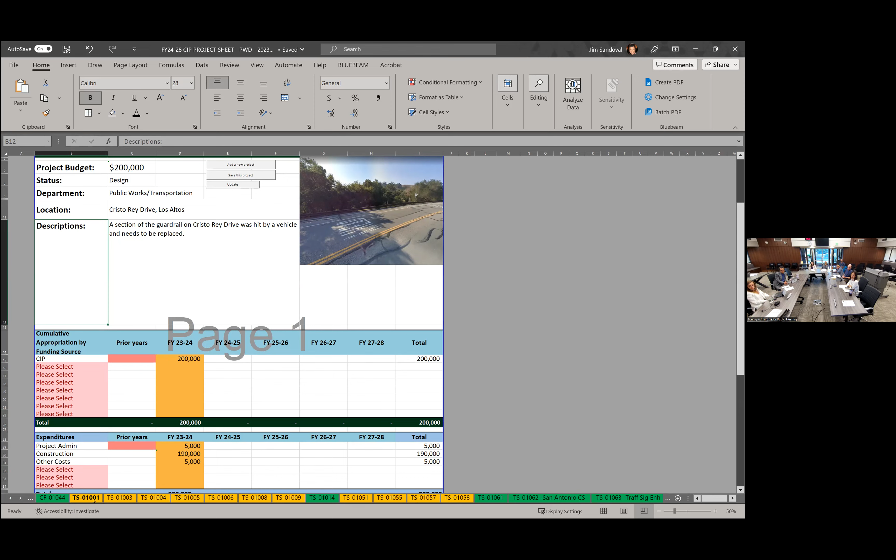Let's look at an example—we'll take this one. There's a lot of funding sources, so I play it conservative. This 2.9 million, that's like—council gave us a $3.5 million goal each year. Inflation is happening, but we're still kind of limited to that 3.5. However, each of the outside funding sources do have a COLA, or they increase each year, but I'm showing them as constant just to be conservative for now.

For resurfacing, as Nafis will show, we're doing really well, so I felt we had some room to reduce it. Even though the cost of paving is higher than it was in 2019 when council set this goal, it's been three or four years and we've been doing pretty good. So even with costs going up, perhaps the 3.5 million was a conservative number, but that's good because it gave us some wiggle room and helped us get ahead of things. The general fund is hard to predict—each year we're seeing what our revenues and expenses are, and how much general fund capacity we have for CIP. So anything I have in general fund in future years is a guess, but everything else that's outside funding, I have pretty good assurance that it is what it is.

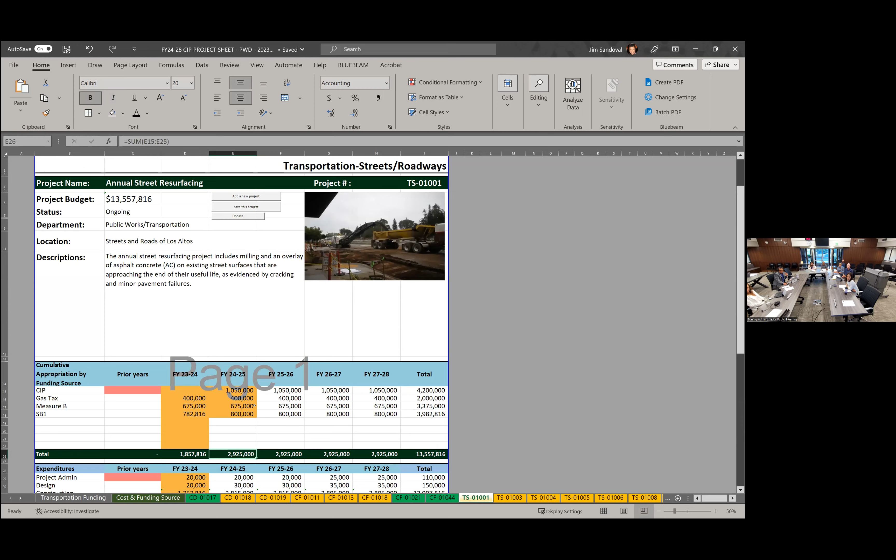Yeah, one of the things the finance director wanted to do was show what our estimate is for how we're going to spend money for each of these projects, how it breaks down. So one thing we haven't been doing, but the plan is for this upcoming year, is to allocate our own staff time to CIPs when we work on them.

Is it new for this year? Yeah, okay. And not every city does that, because, like Maurice and I were discussing, Maurice is paid all out of general fund. Mine is spread around to different funds, but this will help us understand what CIPs actually cost.

And this is across all, not just transportation, I guess. Correct. Yeah, and it's hard to really know because we haven't done this before, so we just put estimates in here. Once we start tracking these hours on our timesheets, we'll have a better idea in following years. Project management, so forth, is 15% or so.

10%, whatever, that would be great. And I think getting a year-end summary on this would be awesome.

That's one. Okay, and then just a clarifying question - was the traffic sign allocation for the traffic sign project about 1 million, and then the in-road signaling for San Antonio is 500? Is that inclusive or separate? It's separate.

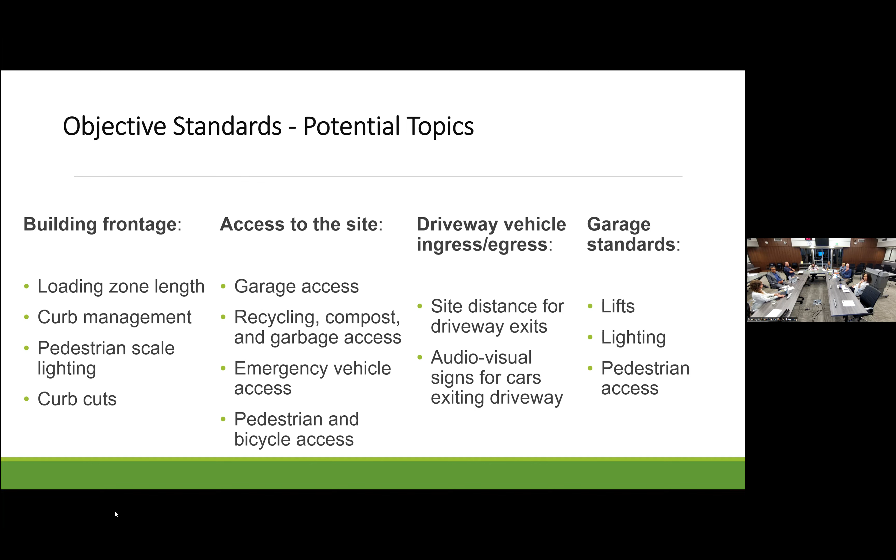I'm not sure exactly what curb management means, but would stuff like loading, delivery, drop off, pickup type accommodations count? Yes, and Marisa, could you just define curb management for us? So curb management relates to the way the curb is used and what is allowed to be done there - it involves loading zones and other ways the curb is utilized.

Are there time constraints put on that? So if I'm delivering something, do I have to stay there 4 hours? It's a standard that can be integrated as part of a specific type of loading space situation. So I live in a community that says very clearly 1 hour. Well, because they actually have two - one that's for deliveries like Grubhub type people, that's a 15-minute one, but then they have one that's more clearly for move-in people.

Okay, so maybe we could put in there curb management time - yes, time, a percentage number of curbs for cars. Not for something like this. The only thing is that usually with curb management, you then have one subsection that trumps it because of red curbing, so you get stuck in that. That's one of those things we'll work through when we move forward with a curb management policy for the city.

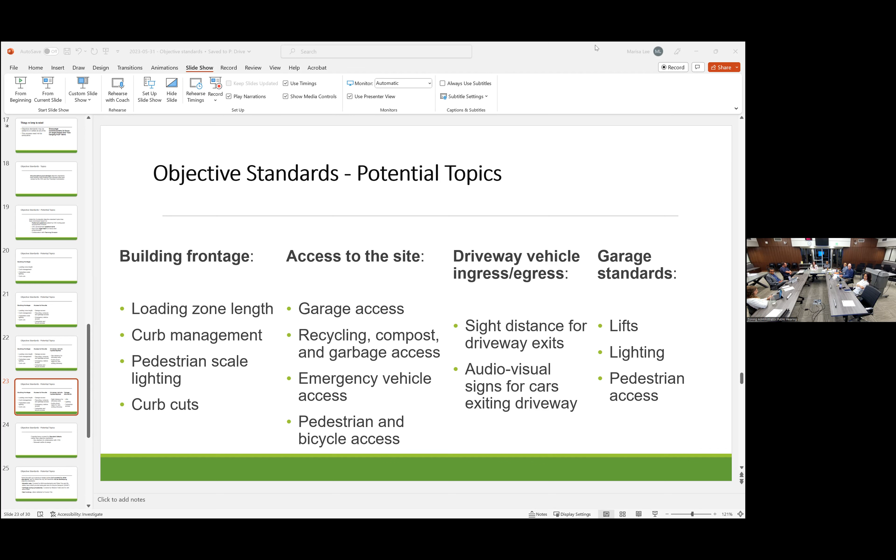Okay, so can you bring up those 3 questions? I think we answered the first one, but let's quickly answer the other 2. Yes, and quickly. Not quickly bring it up, quickly answer those for us.

Okay, so I'm chill on the timeline. Yeah, me too. Another thumbs up. Anyone else? Yeah, another head nod. We're good. Number 3, and I think number 3 is not that important. I just thought if anyone had any thoughts right now on precedent research.

Question: can you give us a list of documents or standards that exist today that may be interesting to this conversation? I'm thinking about the NACTO guidelines. There's a lot published, you know, size and shape and color and width and all that stuff in the NACTO guidelines, and they're written more in layperson's terms rather than professional terms, like the Green Book or AASHTO. But if there's other things like that you've seen, studies or guidelines that are more for the average citizen, that would be helpful.

I don't know how many of you have ever read the NACTO guidelines. I just joined. They're wonderful. Look at this.

So if there's anything like that we should be looking at, maybe there's stuff from law, maybe there's stuff from the league that you've seen that's been interesting, pass them along.